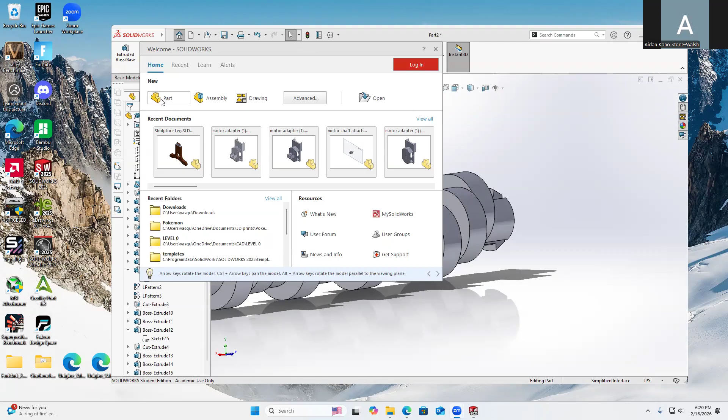All right guys, we're going to be making the motor shaft adapter. This is going to be the second to last part for the kinetic sculpture here.

As always, open the part file. We're going to start by creating a sketch profile on the front plane, just creating a rectangle here. It's going to be 0.6 inches by 0.48 inches. If you're wondering why the dimensions are odd numbers, it's because we had to tolerance this thing to fit a specific motor that you buy from manufacturers, so you'll notice the dimensions are kind of weird numbers for this part.

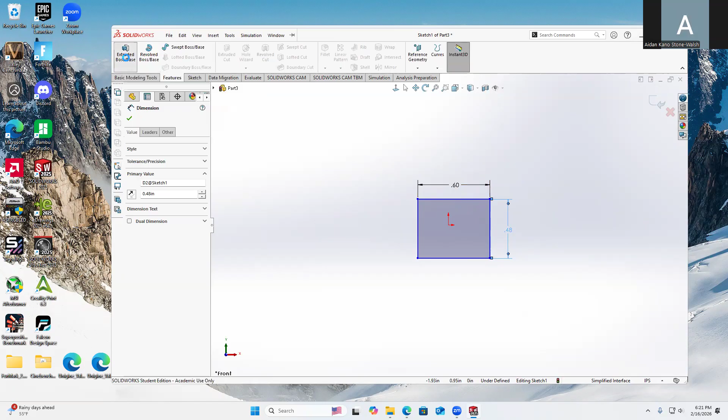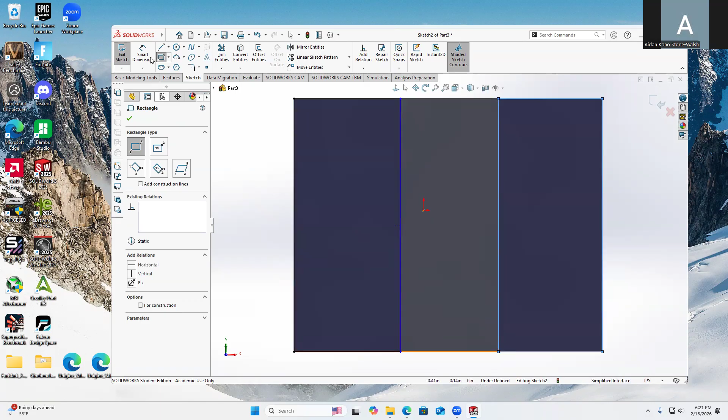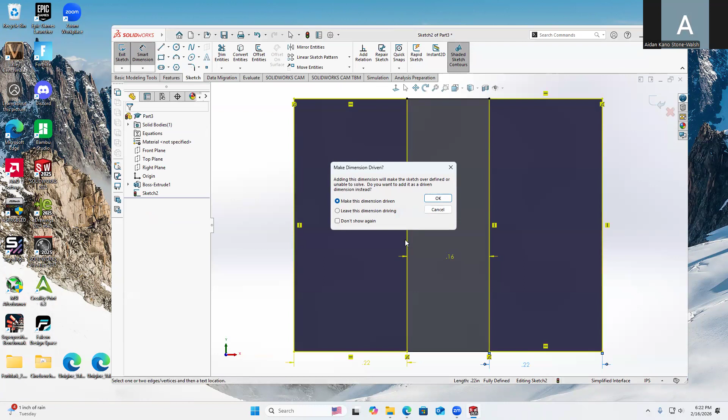We're going to extrude 0.1 inches, then click on this front face. We're going to grab the top corner and drag down, and grab the top corner of the other side and drag down too. Then we're going to dimension this to be 0.16 apart, and 0.22 for our distance here, so we should have 0.22 there as well. Perfect. Then we're just going to extrude here 0.4 inches, doing that blind as well.

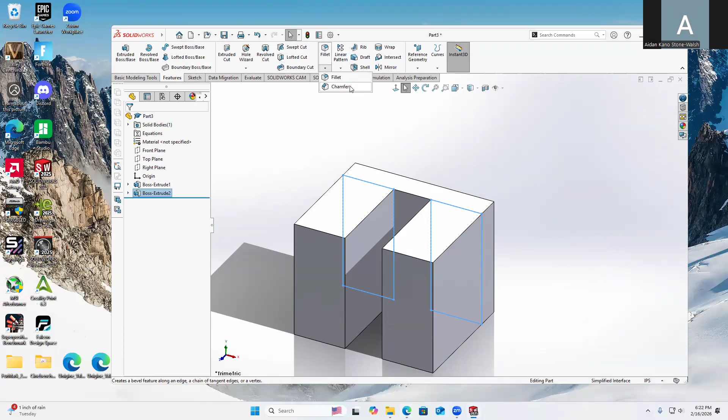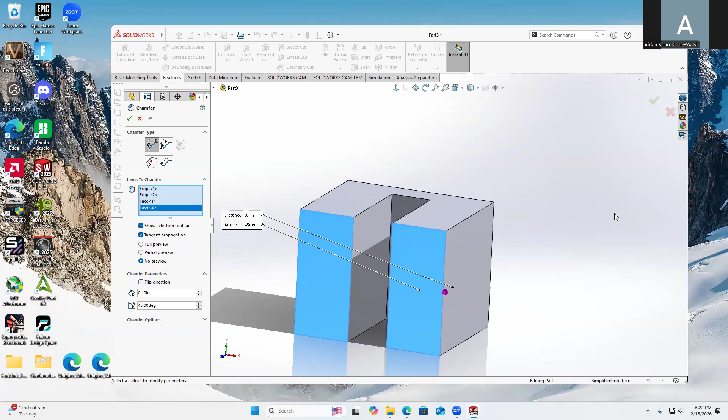From there, we're going to be doing some chamfering. Let's go to chamfer. We're going to use the defaults for the most part, though we will change one thing at the end. We're going to select this entire face right here, and then also this one right here along with this one. Same thing for the other side, this one right here along with this one. And we're going to have it at 0.1 inches.

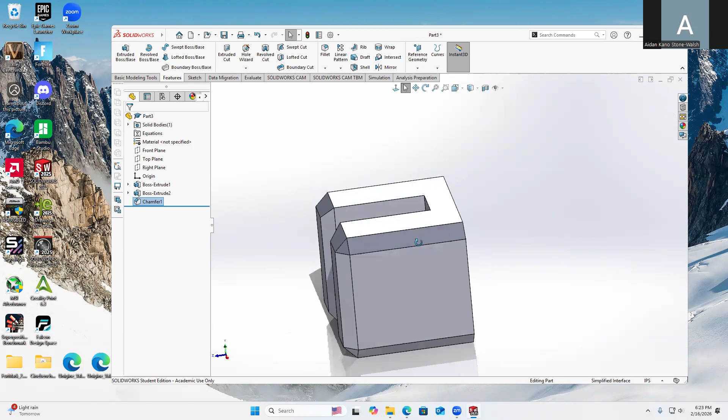It's going to turn into something that looks like this, a little more complex geometry, looks a little cooler in my opinion. If you're wondering the utility of using chamfer, we're going to be inserting the shaft adapter into a little rectangle slot right here that slides in between these two. This is going to help feed the rectangle into that slot, using these little angled edges.

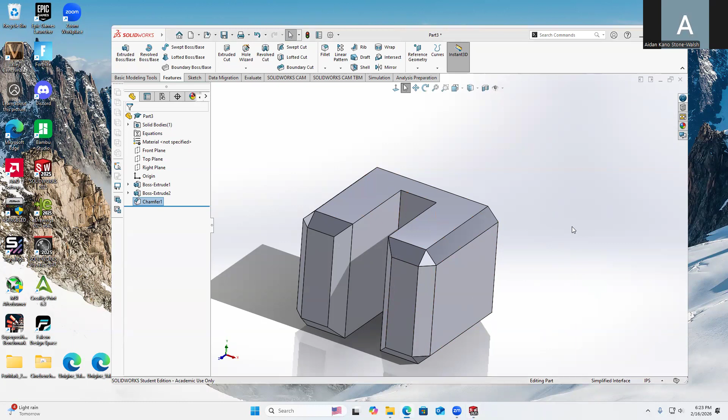Next, we're going to create some reference geometry for the back of this part. We're going to go over to reference geometry on the features tab and create a reference plane. We're going to want it offset 0.6 inches. Once we have it offset there, we just click OK, and now we can work from this plane.

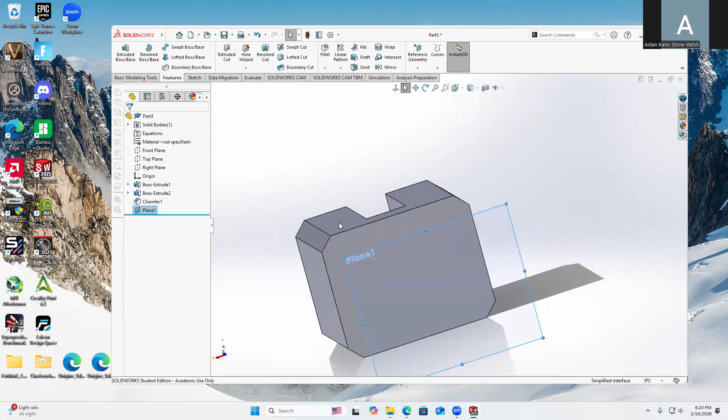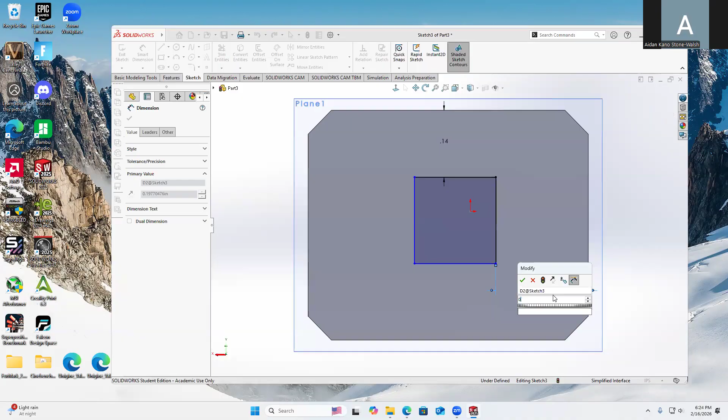So we're going to create a sketch on this plane. It's just going to be a simple rectangle with a circle in the middle. We're going to smart dimension it to fit the center of this backing. So 0.14, sorry, 0.14 not 15. It's going to be 0.2 from here. And then we're going to have a 0.2 by 0.2 rectangle. Dimension this one a little too big here, in fact way too big.

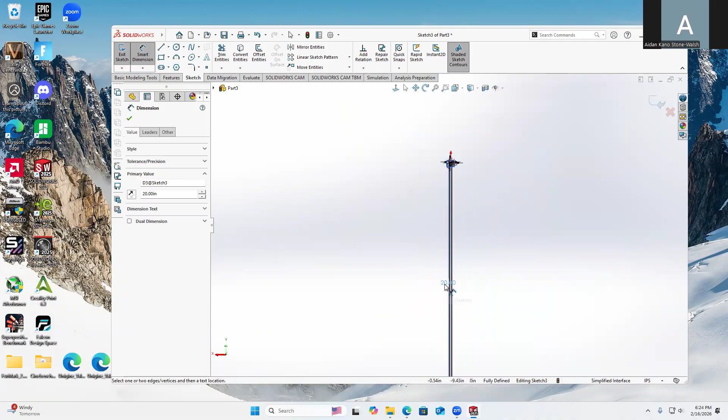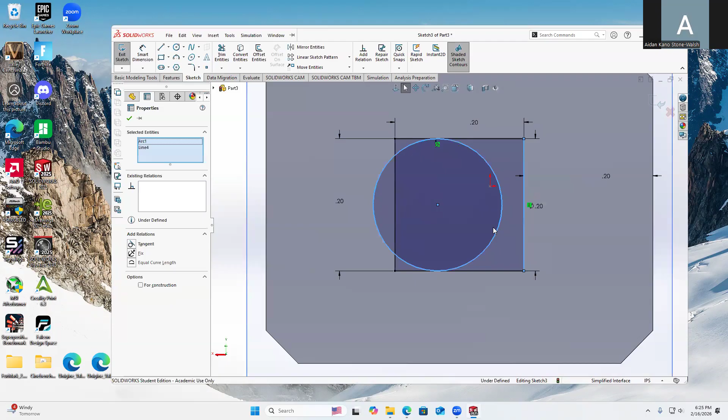Now we are going to create a circle on the inside, so we should have a little reference here. If no reference pops up, that's fine, we can just dimension it by saying it's going to be 0.2. Then we can create a relation where this and this are tangent, and then we just have it perfectly in the center. We might want to do one more relation so that this line and this line are tangent as well. Now you'll see when I try to drag it, it won't move.

Now we're going to be doing something called loft. This should be your first time seeing this for the kinetic sculpture. We're going to go to features, then lofted boss base. First we're going to exit the sketch, then go to this circle and click on it, then go to features and lofted boss base.

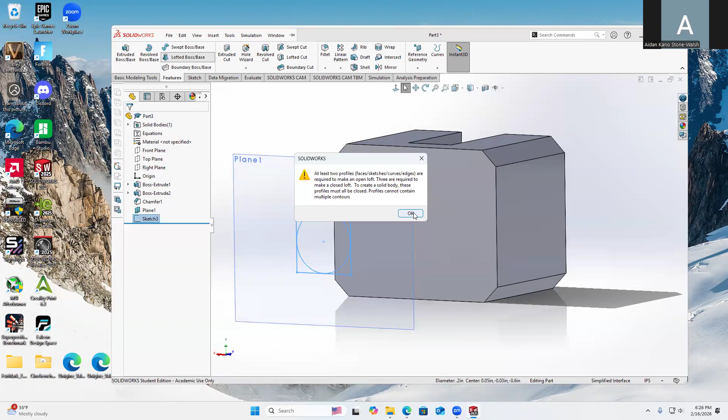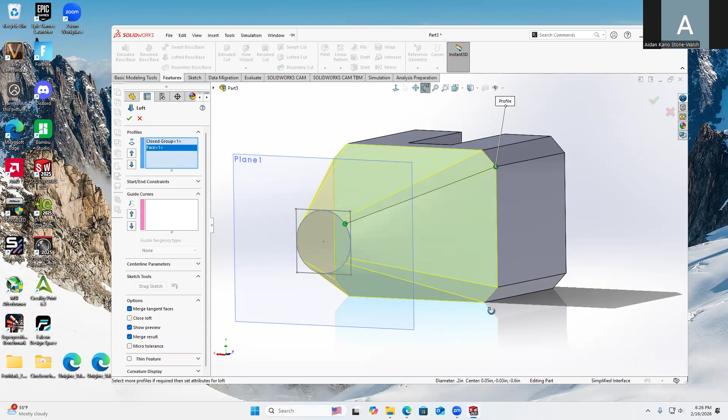At least two profile sketches are needed. We're going to select this circle right here, click that little check mark, and then select this right here as well. You'll see it creates a merge between the circle and the face, slowly incrementing from the circle to the face. From there, everything looks good. If for whatever reason your line looked twisted, just bring it back up until it looks good. For a circle it's tough because there are no points to snap to, but as long as it looks pretty solid you should be good. As you can see it's a little high up, so we're just going to drag it down a little bit, and we're good there.

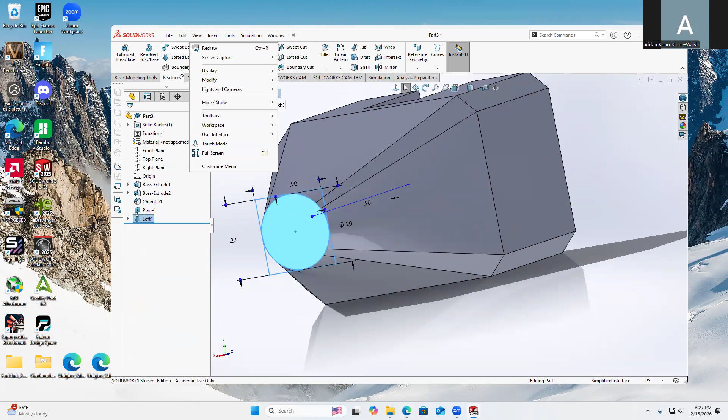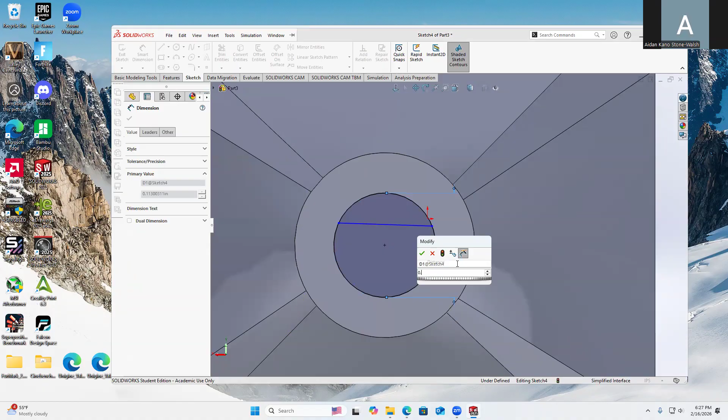Last but not least, we're going to put a little hole into this front face. We're going to go to sketch and create a circle here, then add a little D shaft at the top. We're going to make sure this circle is 0.12, and the D shaft comes up to 0.09. It'll look a little weird right now, but that's okay, because we're going to make this horizontal. Now we have a D shaft there.

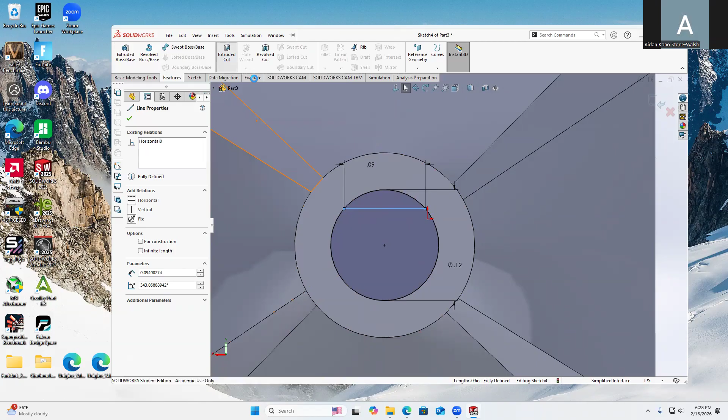We're just going to go to extruded cut here, select just the bottom contour, and cut down 0.4, going to blind, 0.4. Perfect. And we have our completed motor shaft adapter. Thanks for watching, guys.